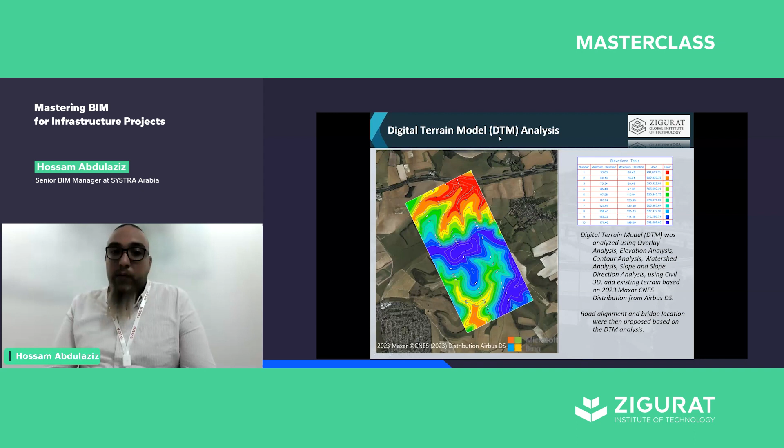We started creating our BIM execution plan based on the project itself, using Plannerly. Then we used Civil 3D for creating the digital terrain model, this is for GIS data. Then for the native model and data exchange, we created our concept using InfraWorks. Our design was based on modeling using Civil 3D and Revit. For integration, we used Navisworks and Synchro, exchanging between both platforms - Synchro being an application for Bentley, and the rest being applications for Autodesk. So we integrated using the IFC format.

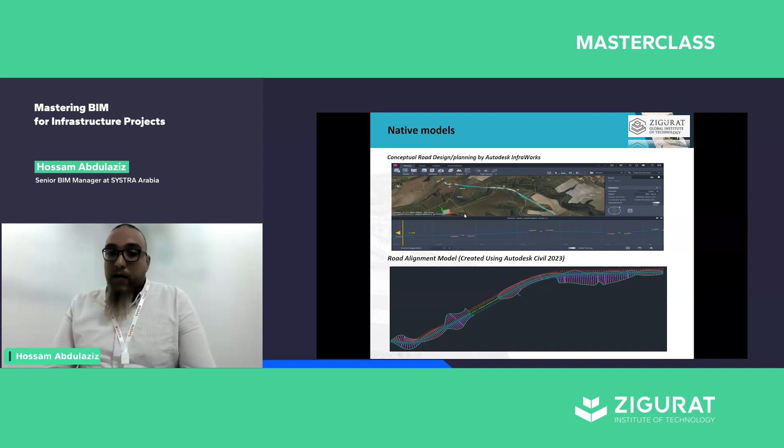This is actually the concept of our route design. And here we created the concept design of the bridge using InfraWorks and Box Culvert.

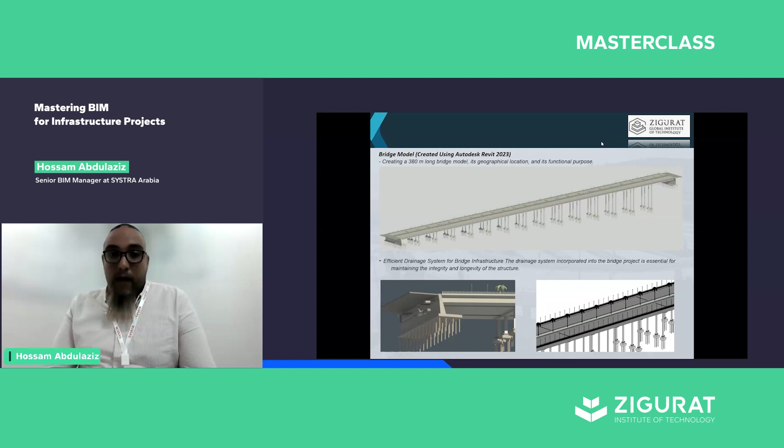Then we start creating the model itself for the bridge using Revit structural, and as well for the Box Culvert.

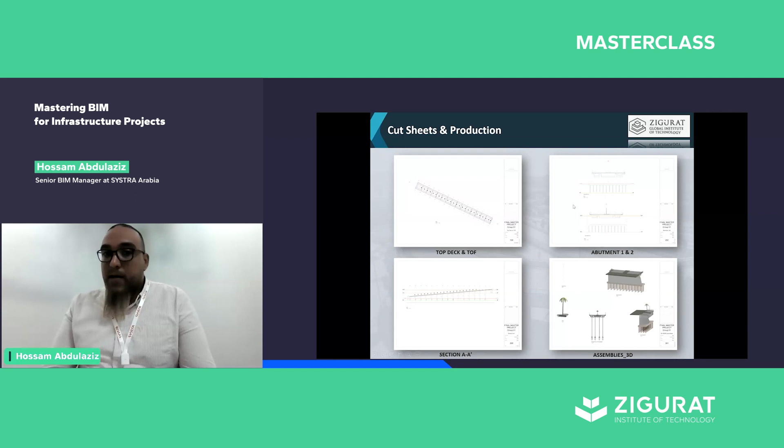We produced some sheets relevant to the plan and the details and sections.

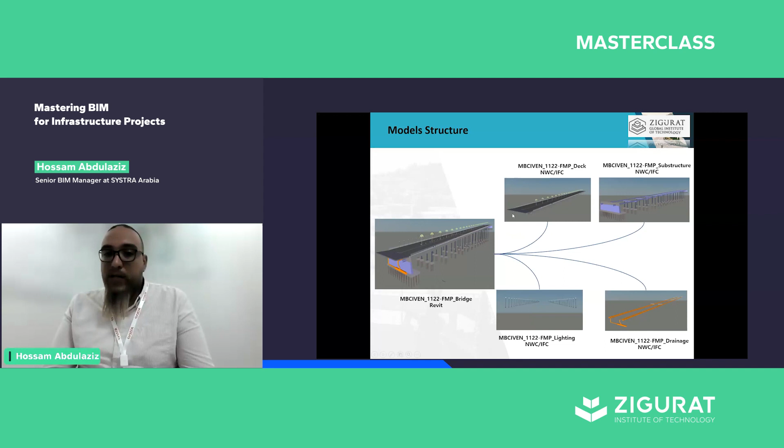The CDE system, we just highlighting how we start creating our design here.

And how we start federated inside one model, because we created the routes itself on Civil 3D, and the bridge created in Revit, and as well the hydraulic culvert or Box Culvert was created by Revit.

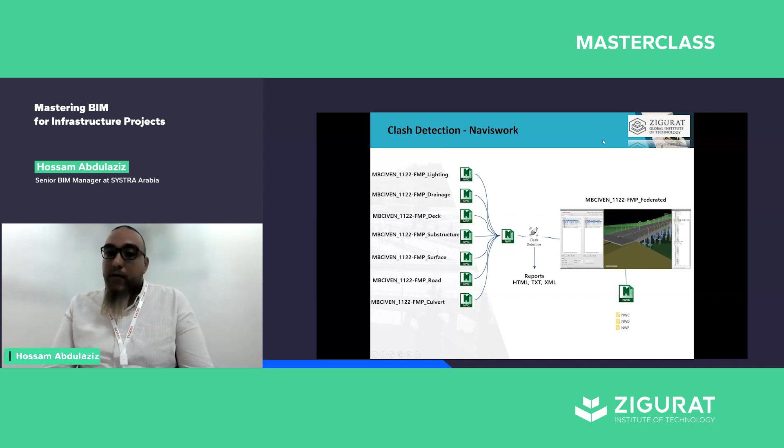So we federated and we run clash detective to have the clash analysis. We had these clashes inside.

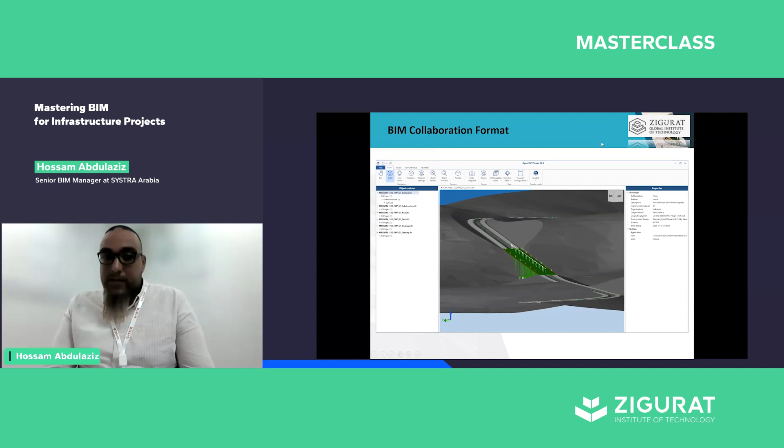Actually, we integrated to IFC and use BIM Sync or Catenda right now. This is as a CDE system. This is from the IFC model.

CDE of choice, it was Catenda Hub. Before it was BIM Sync. We use it to just collaborate in between all the team. We were working for this scope as five team members.

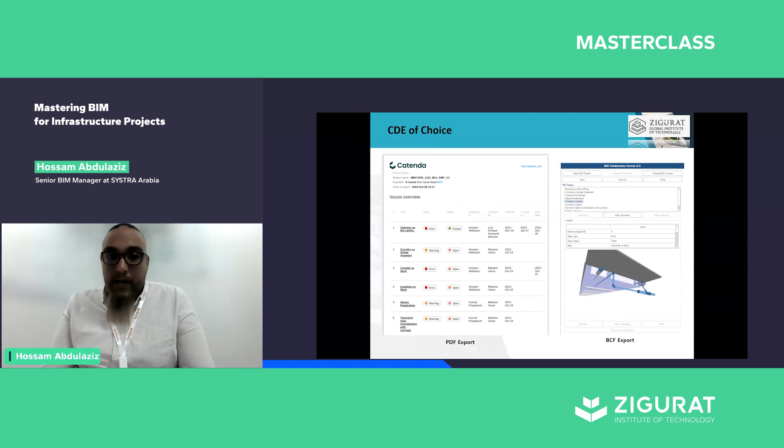This is the clashes and how we created the issues.

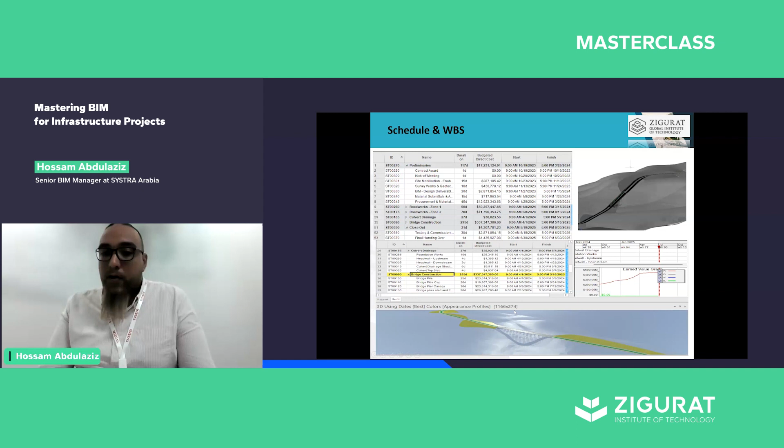Then we created a WBS schedule for timeliner using Synchro, and this was a timeliner when we start until the end.

As well, during this we put 5D for cost estimation, going in parallel with the timeline for the bridge.

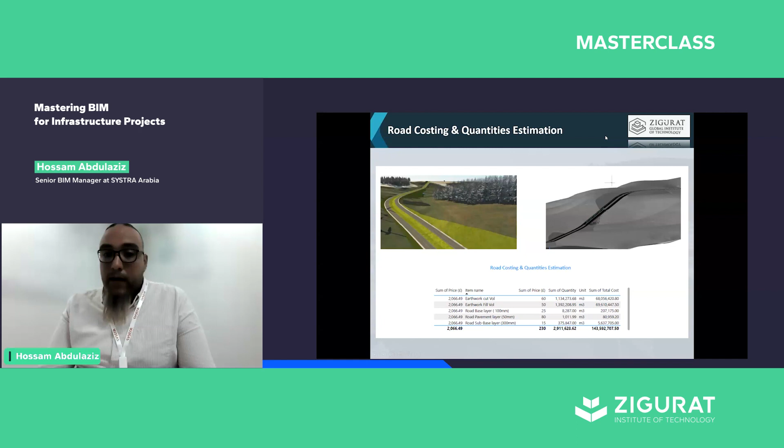Then we created the summary of cost estimation for each element inside the project, road costing and quantity estimation.

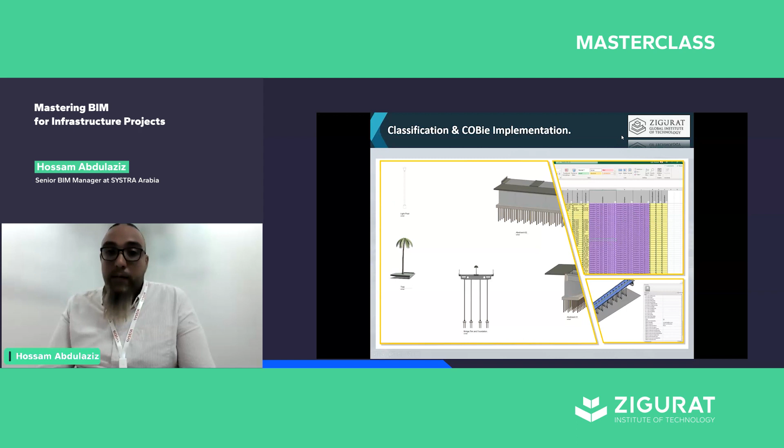Actually, we gained a lot of knowledge during this. I'm really grateful for this master's degree. It has increased my knowledge even within one year to reach a great point actually. This is from my side, and thank you. I'm happy to receive questions.

Thank you very much, Hossam. That was great. I think that was a great way to show how all this theory comes into practice, and to show also the kind of knowledge you can get if you pursue this master's program, because you're going to put that into practice. So I think that's a very valuable point of the program.

So I'm just going to answer Isaac Paul, sorry if that's not pronounced correctly. I think he's asking, is there any BIM for architects? Actually this program is more geared towards civil engineers because it's around civil infrastructure projects. But if you're interested in BIM for architects, I encourage you to see the master's BIM program, which is more open to construction sector professionals.

And then Hossam, Andres Silva says, I thought ISO 19650 LOD is done with. What can you say about that? Actually, it is not done with the LOD system. Yeah, we still have BIM level 1 and BIM level 2, but it is relevant.